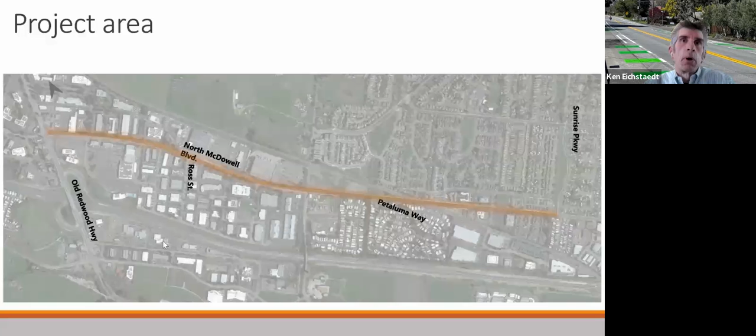So the scope, an important part of the work, is the sidewalk gap closure, the roadway reconstruction. We're improving the bike lanes and putting in new and enhanced crosswalks at 4 different locations. We're making signal timing improvements, and we're improving the transit access. The rough cost of this right now is $12 million.

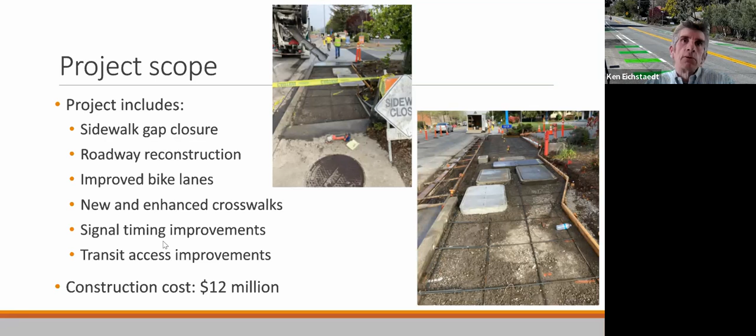I have no shortage of people asking about when North McDowell is going to be improved. So we are doing it. And we want to enhance the active transportation elements along this corridor.

Along with that, for the folks using the transit facilities, we want to improve the bus stops and the access across North McDowell. We want to look at reducing congestion by improving the signalization. We want to facilitate commerce and make sure vital traffic going to our businesses on this corridor can get in and out. And then we want to look at what we're doing for the future here and the council-approved climate goals.

So we start with retaining walls. You may say, well, that's maybe not much of a big deal, but it actually has a pretty big impact. We have a lot of occurrences where there is no sidewalk, and in order to get the sidewalk installed, we need to put some sort of retaining wall in there. We've been working carefully around the trees, working with arborists. I've made multiple presentations to the tree committee, trying to minimize tree impacts and find the right place for the sidewalk to go.

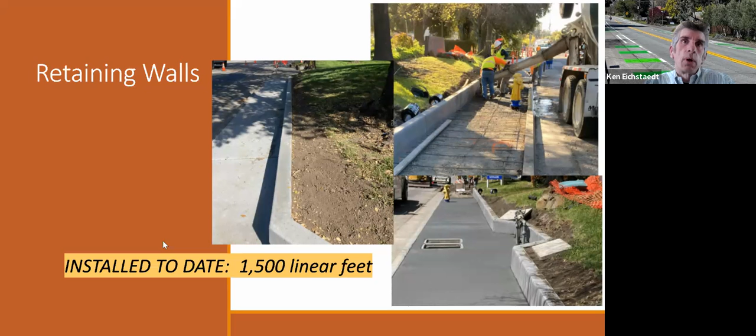So if we look at closing these sidewalk gap closures, we've done over 10,000 square feet, over a third of a mile. We have more to do. We're improving this path of travel.

I've seen people, particularly down by the Petaluma Health Center, having to walk in the roadway because there was no sidewalk. We are making ADA compliant sidewalks so you don't have to necessarily be on a steeply banked driveway ramp. You can get around that safely. There's a lot of effort that goes into this. You may think it's just simple flat work that we put in there, but there's actually a fair amount of effort to realize this important goal.

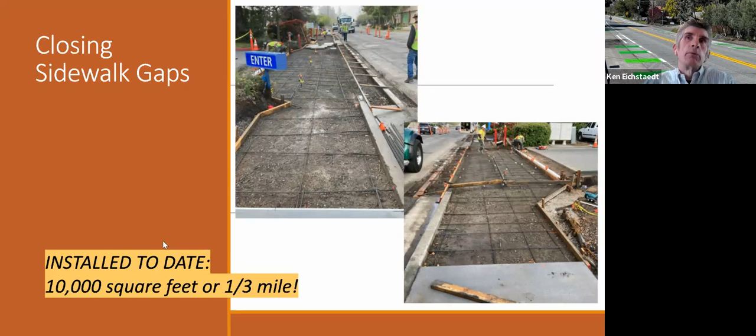And then we get to where we can put in the curb ramps. This, for me personally, is very exciting because here we've got an opportunity to do bulb-outs so we can reduce the pedestrian crossing distance. We can shorten the time motorists have to wait for the pedestrian to cross, and we can improve visibility and sight lines for both pedestrians and motorists along this corridor.

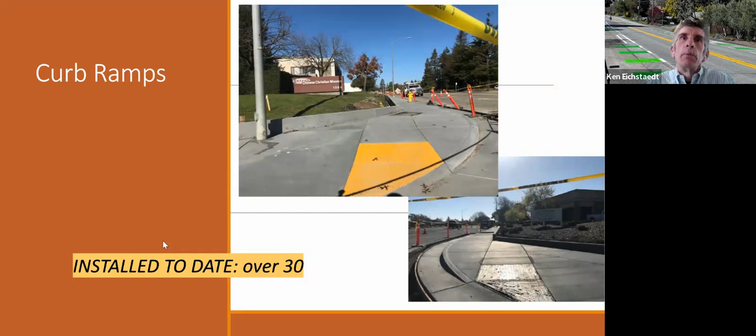So we've put in over 30 curb ramps, and we have probably about that same amount to go. Actually, maybe a little bit more than that.

And then something that's not as romantic as doing the sidewalks: utilities. We're taking the opportunity to improve some of the utility laterals that needed to be replaced. We're having to raise and lower utility vaults, and we're going through various utility purveyors to do that—Sonic, Comcast, AT&T, PG&E—working with them. And then we're going to be reconfiguring the irrigation system. I'm directly working with property owners to ensure that we put something back that's going to help the city into the future.

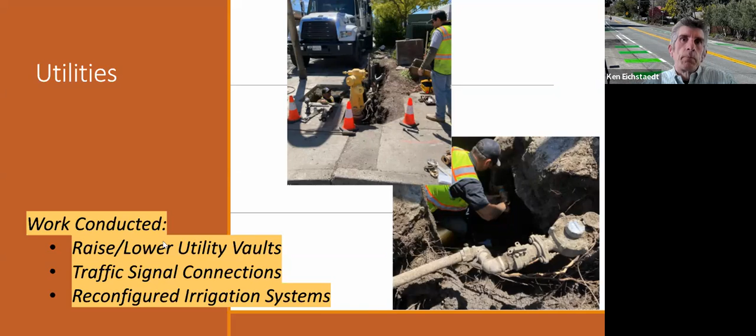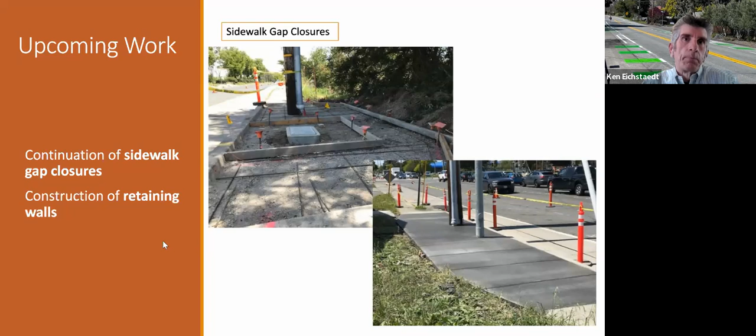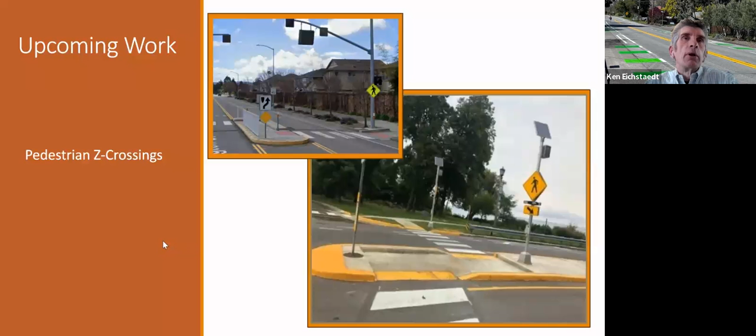And we've also got pedestrian Z crossings. The city is going to be installing 3 pedestrian Z crossings. There will also be a crossing at Petaluma Estates that we're working with, collaborating with SMART on, that will allow pedestrians to get across McDowell, across the railroad tracks, to the future multi-use path that will be installed by SMART as a future project, which I'll talk about a little bit. Pictures here on the right, the upper one is Washington Street by the airport, where we installed a Z crossing there—that's a good example of what you'll be seeing here.

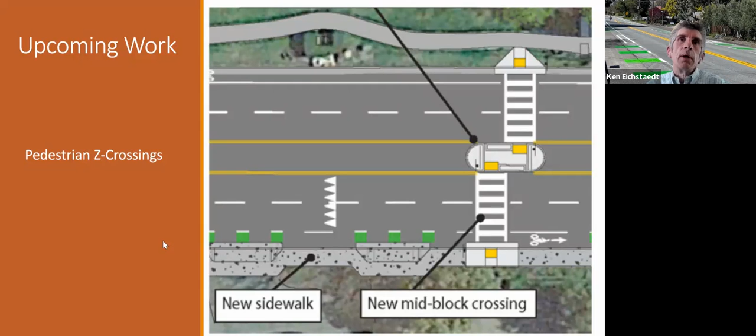We're initially installing these with RRFBs, rapid rectangular flashing beacons, but we have another project going forward with a Hawk system that would actually create a full stop condition to allow this pedestrian crossing to move forward. There's more involvement in getting that element of the project forward—we need to get power, we have to work with PG&E on it. So we didn't want to delay getting these installed and doing it in an expeditious and safe manner.

So now we've got a couple of pictures on the bike lane. In the conflict zones, we use green paint. The two upper pictures here on the left and right are on either side of the SMART tracks.

We're coordinating with SMART on their work. They're actually going to end up doing some of the pavement work because they've got a project to replace the track panels you cross over that are in bad shape. They're the original panels from when SMART started operating on the corridor. So they're going to replace those and do some pavement work, some signalization, and then install the crossing for the multi-use path.

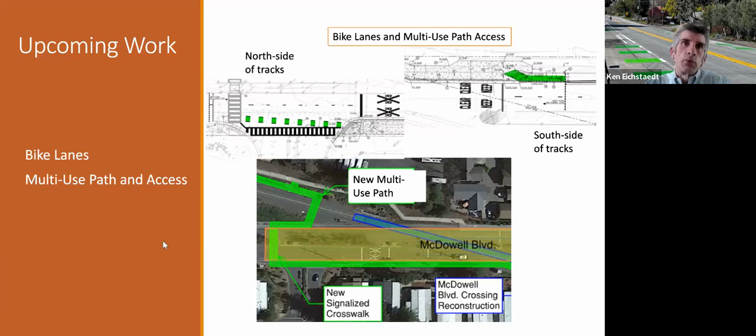The picture at the bottom, the green is the path to travel on the multi-use path, the crossing on the left there of McDowell, and then an FRA crossing of the tracks, and then you would continue north towards Penngrove, towards Corona Street.

This is an important part of the work, and kind of the heart and soul of it is the pavement reconstruction. I won't get into too many details, but there's been a lot of careful planning and engineering that has gone into this. We're using a process called cold central plant recycling, which reuses all the material. It's a system of pavement reconstruction focused on environmental sustainability and reduction of greenhouse gases.

The initial step is to grind the pavement and part of the sub base, the rock base below the pavement, remove that, reprocess it, and then bring it back out and place it down. But there's a cure time on this, and the extent of this work is going to be up to 3 months, so I want to get everybody ready for that.

If you have any questions, feel free to ask, but recognize it's been a bit messy so far. I checked in with Sergeant Spiller, the traffic officer, and there have been no crashes made aware to him on it, and we will be doing enforcement to try to keep the safety along the corridor, keep it well intact as we move through these different operations.

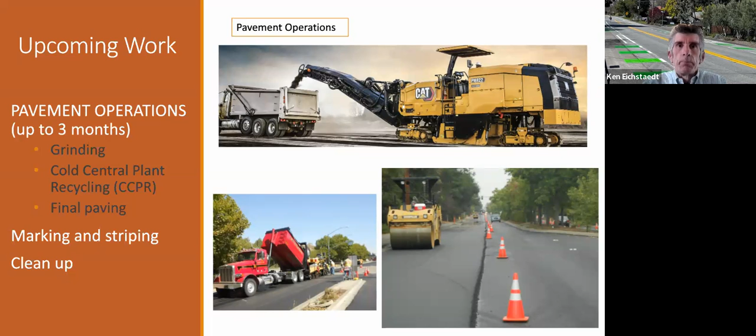So future improvements -- I've met with ReLeaf and walked portions of the corridor with them. As I said, I've presented to the tree committee, and we are actively moving forward with certainly replacing trees, but actually putting in new trees just to beautify this corridor, and also working with our Deputy Director, Chelsea Thomas, on how to provide for drought tolerant landscaping, and working with the property owners on that effort.

In order to put something back here, it'll take us the next 30 years. So I'm particularly excited, proud to see this work move forward. We need to get all the construction work done, but this is something that is very much in play.

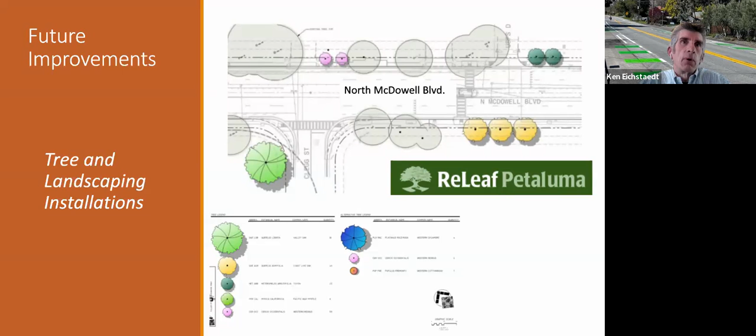And then some of the other work that's going to be going on is what's happening with SMART, with the new station that's going to be installed, and then the future Corona development.

With regard to the SMART activities, there's four main activities: the station, the track panel replacement -- those are the panels in the roadway you've noticed when you drive across the tracks on McDowell, which will be replaced with a smoother, more durable condition -- and then the multi-use path going from South Point all the way up to Corona and then on up to Penngrove, and then the crossing I'd mentioned.

The Corona development work, I don't have a direct schedule on that, but I know that is in design. The SMART work is probably best to go to the SMART website for, but we expect that work to be starting early to mid next year.

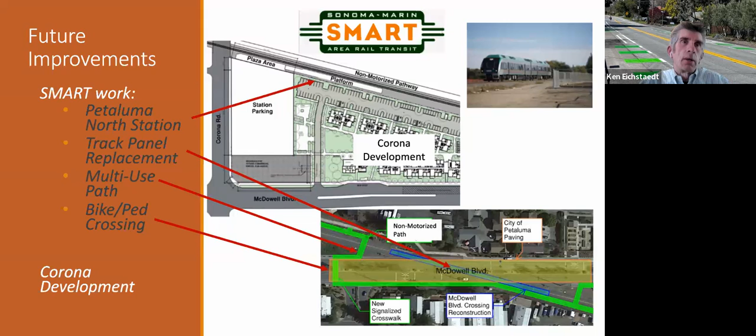So tentative schedule: we're proceeding with the work along the boundaries of North McDowell, putting in the sidewalk, the retaining wall sidewalk, doing the curb ramps, and we're going to move in the middle of June. We expect the pavement operations to start, and those are going to last approximately 3 months.

I should also mention the traffic conditions at that time -- there's probably going to be a lot more one lane each direction occurring during that.

I do want to emphasize it's very important that all driveways are open. If we can't keep all driveways, there is definitely an alternate route provided, but we're trying to minimize that occurrence. We're trying to keep all driveways and intersections open.

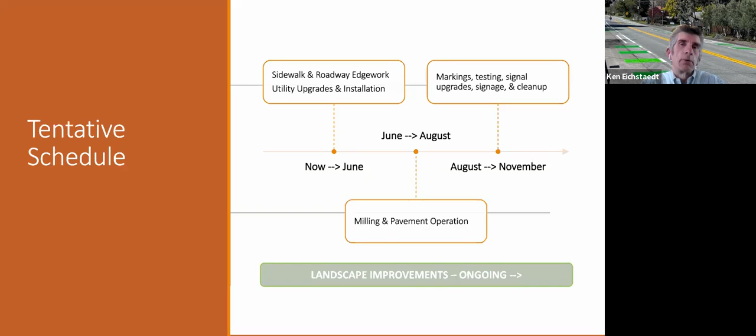I will mention that SMART's work may have a different impact. So what I'm talking about now is directly related to the North McDowell Complete Streets project. We're moving into November when we're wrapping things up, doing final testing, punch list items, and cleanup. The landscaping will be going on through that process once we end. So I did want to make mention of that. Thank you.

Okay, thanks Ken. So I'll take it from here, talking about the community outreach we've done so far. Communicating about this project to the people of Petaluma is super important to us. This is a really well-used roadway and a very important part of people's day for many people in Petaluma. So pre-construction we held two community workshops to gather feedback from the community about what they would like to see on the corridor.

Oh, hey Christopher, did you want to hop in? Okay, I saw you pop up.

We've run ads in the Argus. We have signs on site advertising the project. We've sent dedicated emails to people who've signed up to receive updates, so some of you may have received those in your inbox today promoting the meeting tonight. We've sent postcards, did a citywide mailer ahead of the project starting, and have since sent dedicated postcards to certain areas, like the McDowell neighborhood, the neighboring businesses and homes in the nearby area.

We've done key stakeholder outreach. For key businesses along the corridor, we've actually gone door to door to introduce ourselves, explain the project, and gather contact information so we could easily get in touch with people as the project progresses, really wanting to ensure we're causing the least disruption to the businesses in the area and to the customers visiting those businesses.

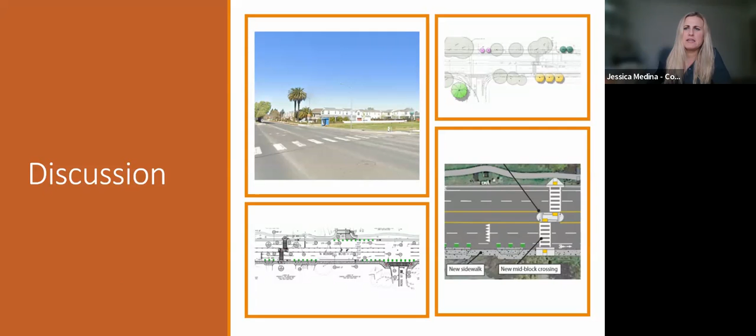I believe when this project went before the council late last year, there was some discussion around road diet and potentially revisiting the idea of protected bike lanes on North McDowell. I'm just wondering if that has been looked at again, factored into your design at all.

Thanks, yeah, I'll go ahead and take that, Emily. So yeah, we are actually modeling a conversion, 5 to 3, on North McDowell. We currently have 2 lanes each direction with a center turn lane, 5 lanes, and we're looking at what would the effects be to narrow that down.

The challenge with North McDowell is it's got over 20,000 ADT, average daily traffic, but the bigger part of that is almost 10% truck traffic. The main USPS distribution facility is at Corona and North McDowell, so trucks are coming in there 24/7. We've got a lot of industrial places along the corridor there, so that really affects the traffic. Vehicular traffic is one thing, but truck traffic has a big impact.